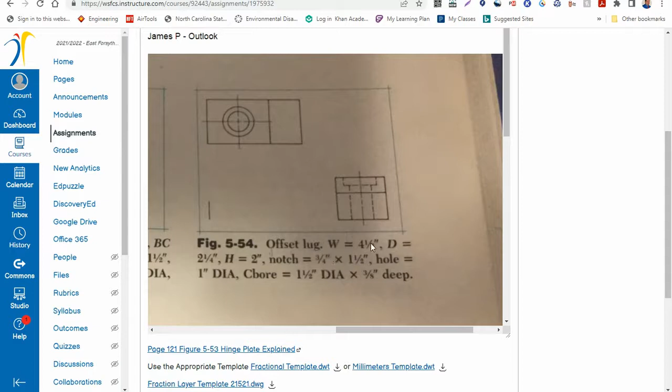What we're going to start off with, we're going to go to the top view first and work the top view down. So the top view is going to be 4.5 long and 2.25 inches wide.

Let's go to AutoCAD.

What I'm going to do is go ahead and set up, since I already know what the layer properties are because I've already got those set. We've got my center, my dimension lines, my hidden lines, my object lines, and construction lines. My object and construction lines are continuous. My object line is 0.5. My hidden lines are 0.25, and they're hidden. My dimension lines are continuous and 0.25. My center lines are center type, and 0.25 thickness.

So let's go ahead and get started with the drawing here. Start with my construction line, and it would help if I got to my layer here. Turn on my ortho mode to make sure I'm straight as I'm working. That sets my zero point right there.

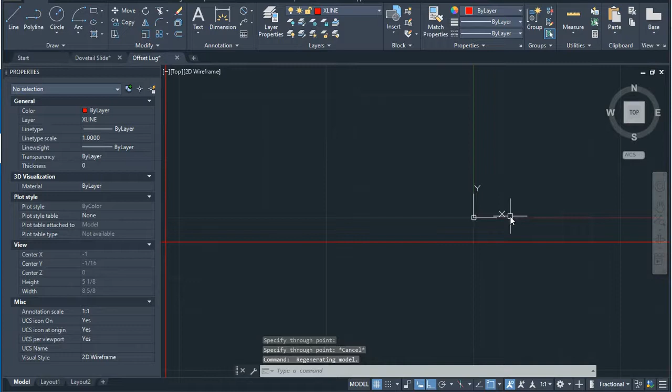Now, going back to my drawing, I know the depth is 2.25 and the length is 4.5, so let's get started with the block on that one. I know it's 2.25 inches tall, by 4.5. All right, so that's pretty much my top view right there, except for blocking everything in.

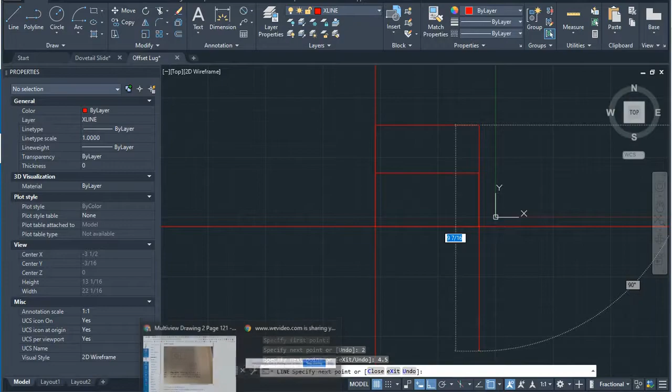That at least gives us something to tie off of for our top view. We're going off of that for 2 inches, come down 4.5, go 2.25. Let me check - my depth is 2.25, my height is 2 inches. And then my height there is 2 inches, 4.5 by 2.

Let's get back to our drawing. I'm going to offset that end line here inside 1.5 inches. And right there it is.

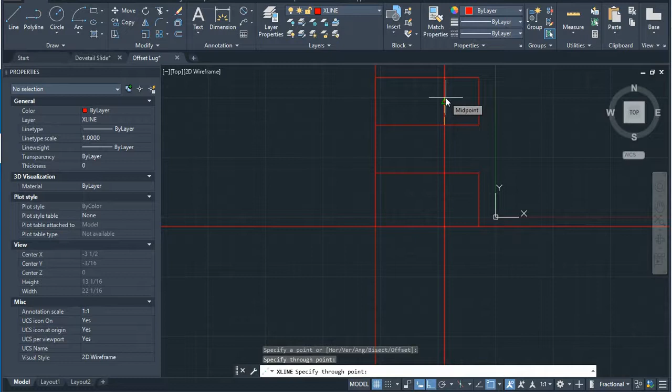I know it's 1.5 this way, 3/4 down is what it's talking about. But one of the things I can do now is set my construction line there, come down 3/4 of an inch (0.75), come over one, come over here to 1.5.

Now we get back to my circle on my top view, my counter bore. My center circle, even my outer bore, my outer circle is going to be 1.5, and 1 inch diameter is my circle going all the way through. The counter bore is basically made for a machine part to fit through there with a nut and a washer on it, or an axle of some type with an axle clip.

All right, so let's go back to our drawing. We're going to draw that center hole, 1 inch diameter, and then put a diameter on the outside of that - a concentric diameter. Now, they're both diameters.

So let's get our circle tool. Let's go in here. Now there's more than one way to do this. We can find our center, where the center is going to go, by crossing these up here. Turn off our ortho.

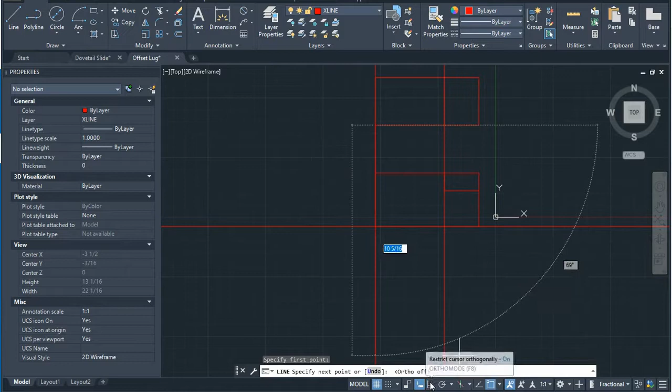Remember, we're on a construction line layer. My center circle there is 1 inch, and my outer circle is 1.5.

Now we could have found that if we'd blocked this in, joined these sides together here, and made that into one polygon - we could have found the center using the geometric center snap. But it's a whole lot easier and quicker doing it this way, just having your rectangle shaped out, putting your X in the middle. We're on the construction line layer anyway, so why worry about what it looks like on that layer?

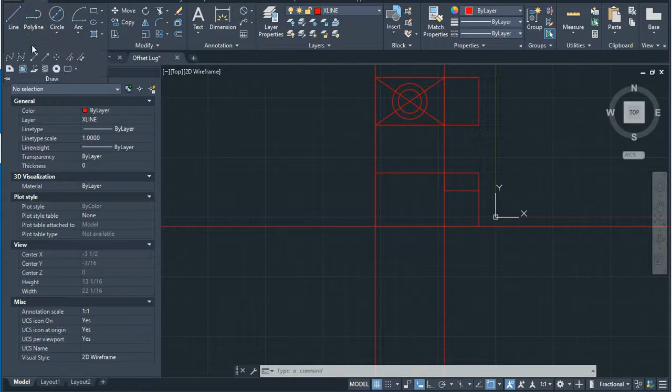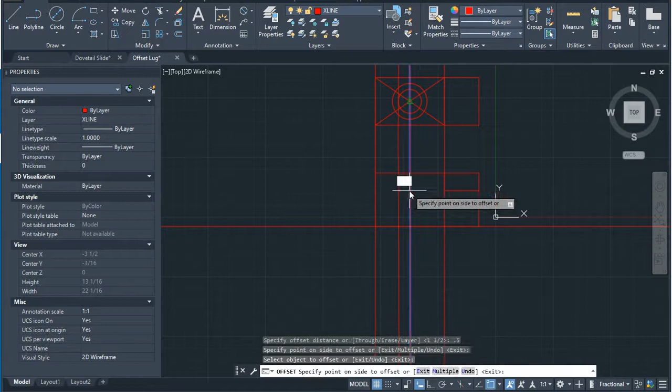All right, now what we're going to do to translate these lines down is, first of all, come down here with a construction line. We could sit here and painstakingly take these lines one at a time, but guess what - I'm not going to do that. So I'm going to select that line and offset it 0.5. I'll set it on this side 0.5. That takes care of the 1 inch circle in the middle.

Then we'll go here. Now that line is going out 3/4 of an inch - the next line, 0.75. Right there, and then out here. I know it's 0.75 from here to the outside of the line because it's 1.5 in diameter, 0.75 from the center to the edge there.

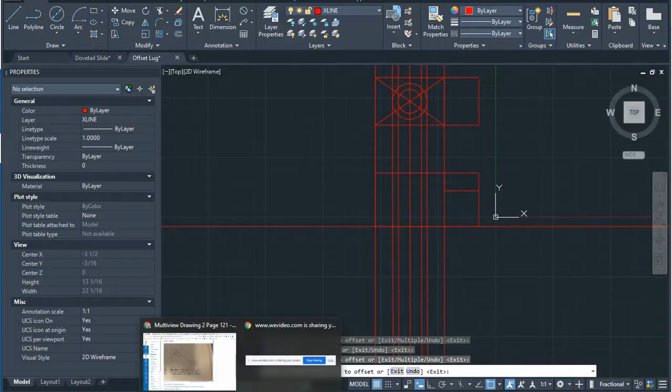Now, we need to get back to our drawing and look how deep this goes. We know it's 3/8 of an inch deep.

One thing we could do here, escape, we can actually offset that line right there, 0.375 or 3/8 of an inch below here, and then we're able to come in and hit escape. Now, that actually helps us draw later on when we're drawing.

All right, so I think that's it from the top view and the front view. We just got to worry about the right side view now. We know the thickness, or the width of that, is 2 1/4. We know the height is 2. We know how that notch is placed.

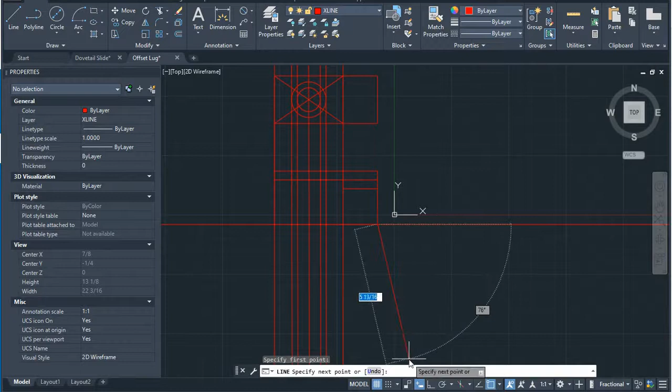Let's go back to our drawing real quick. Get our hand tool, move that over a little bit. I'm going to go over 2 inches. We turn on our ortho mode again. Go over 2. Go up 2 1/4. Go in 2. Back down 2 1/4. In 2.

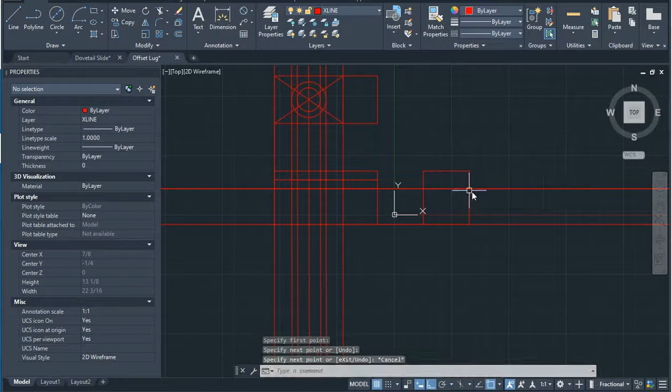Now we can put our construction line there if we want to, but guess what? I guess we'll have to, because that's not showing off my extension line there. And then I'm going to take a construction line down through the center of that to help me with this next thing here. All right, so what I need to do is finish blocking in that hole here.

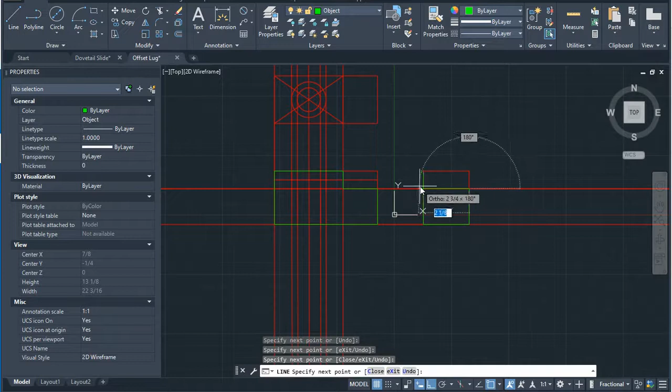And now I'm going to get to my object line layer. Basically just copy everything I've got that I know should be there. I'm not even looking at the measurements, I'm just waiting for the end points to come up. That's the beauty of having your construction line layer and being able to turn it off.

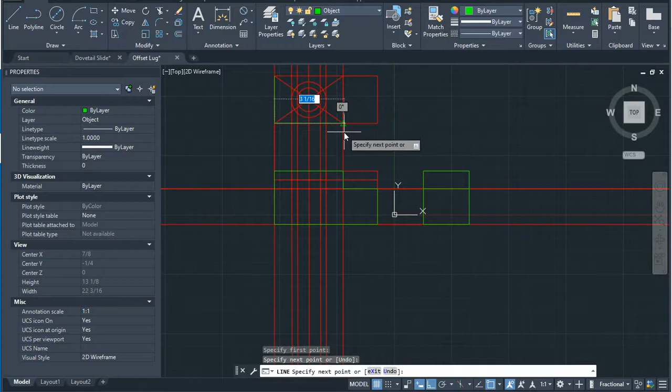Go up here and block this in. Type in 1 inch for the middle circle there, and 1 1/2 for the outer circle. 1.5.

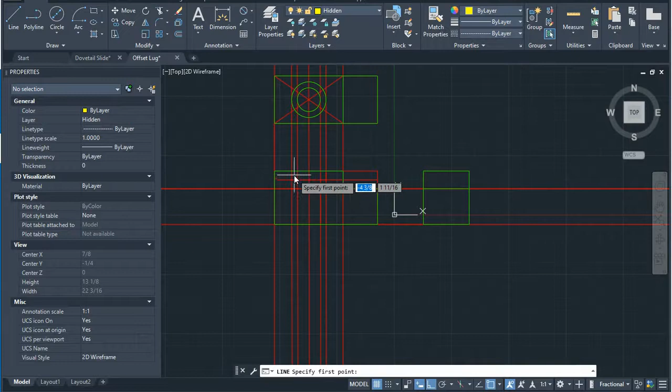And then we're going to measure this. We're going to change our layer here, our hidden layer. And this is what we're going to do right here. We're going to zoom in, and we're basically just showing you what it would look like looking at that from an X-ray vision.

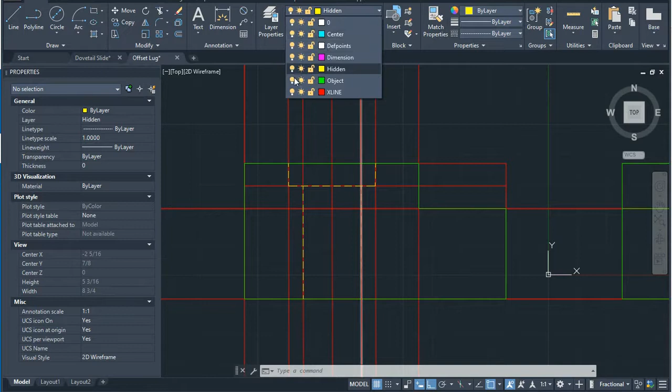All right, now I'm getting ready to do something else to blow your mind here. I'm getting ready to offset that one by 1/4 inch, 0.25, just something to help me out here. I did the one on the bottom, 0.25, offset that as well. Hit escape. Now I'm going to go back to my object line layer.

I want to go to my center line layer now. I don't want to change the color, I just want to go to it. This is one reason. Move those lines up and down there.

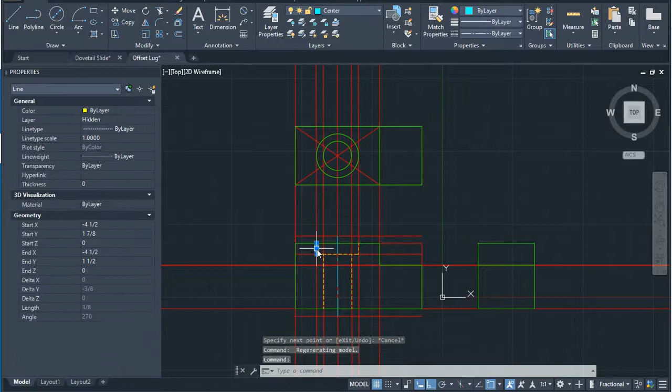That way I have some way to lock onto it because I've got so many line segments there. Now what I need to do is select that line, this line, and this line. I can copy that using this as my base point right there. Look, I lost something out there. Now I'm going to try to go copy it again. Set that as my base point. And there's my midpoint of that line. Hit escape.

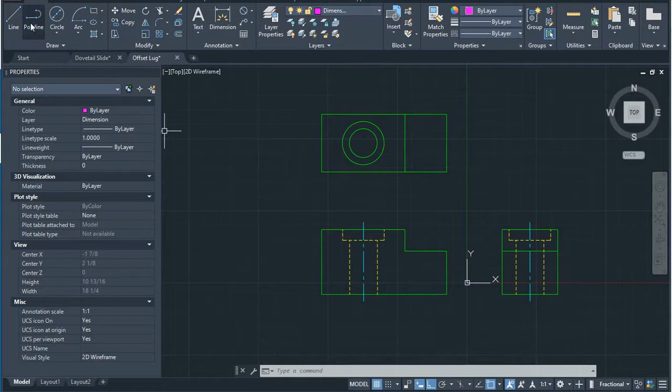Turn off my construction lines, and just go to my dimension line layer. We knew that one was 3. We knew that was 1.5. We know that's 2.

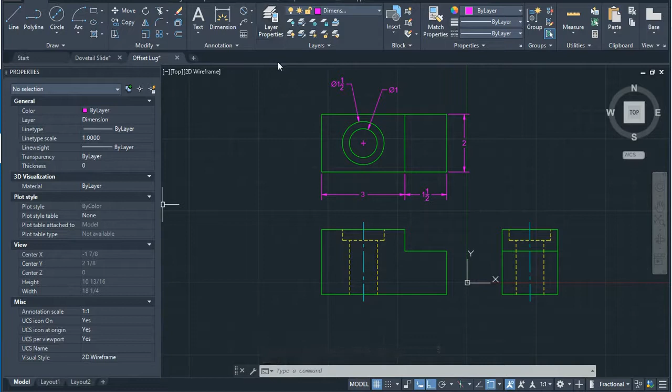Make sure you dimension your circles in the view that they're circles. The outer one's 1.5, inner one's 1. Now there's one dimension here that I got to add in. That's 3/4.

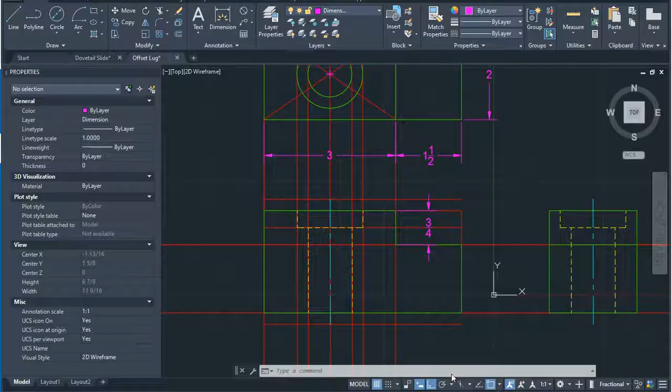No, that's not right. Give me just a second here. Yeah, that was right, I'm sorry, just had to check. I scared myself there. I make mistakes, so I just want to make sure I didn't make a big one there. I scared myself into thinking that was 3/8, but it's 3/8 in your counterbore.

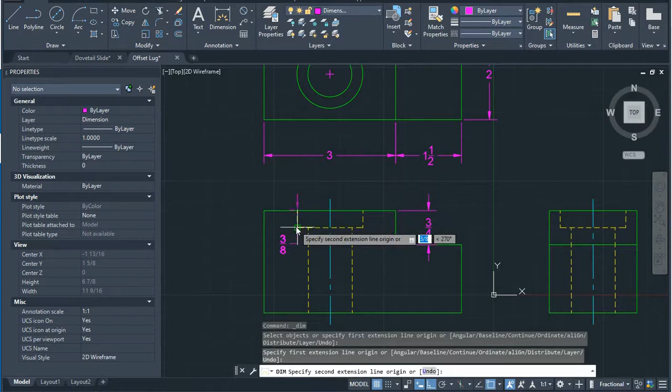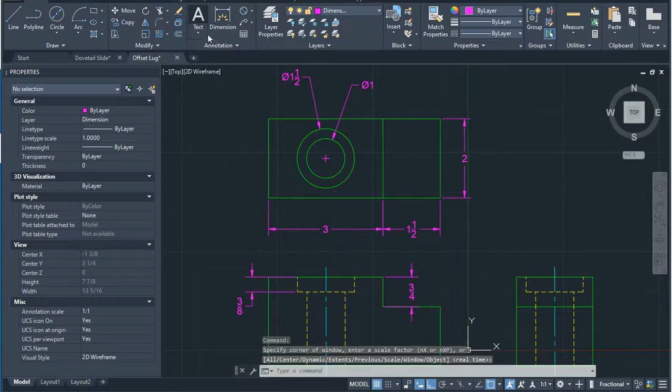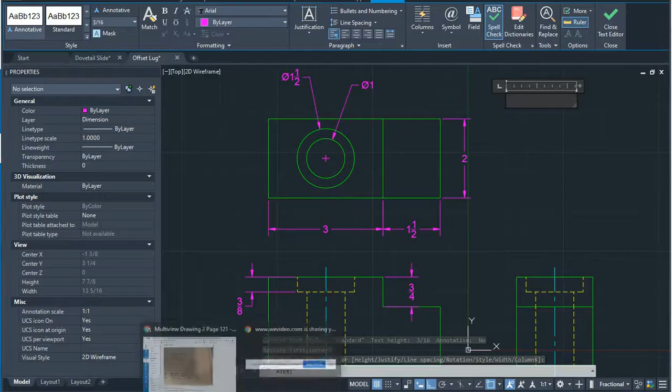And one of the things you can do here too, you put a note on your drawing. I like using the multi-line text because the counterbore, the C bore, is 1.5 diameter by 3/8 inch deep.

So basically what you would do is write your note: counterbore, C bore, 1.5, diameter. I can spell right and get my keys to hit right.

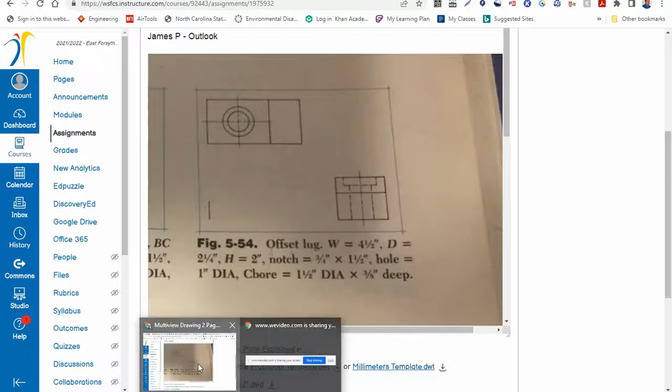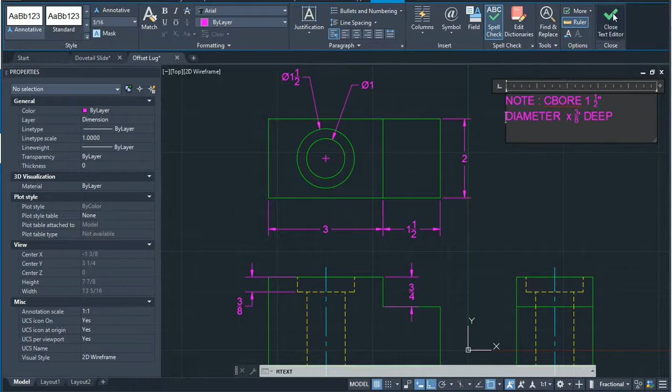Counterbore is 1.5 inch diameter times 3/8 inch deep. Just use the X for the times, 3/8 inch deep. And I'm going to do that right there, close that text. I'm going to move that closer to the counterbore.

My computer is being slow again.

And what we can do here is we draw an arrow. My computer's fighting with me over putting this leader here.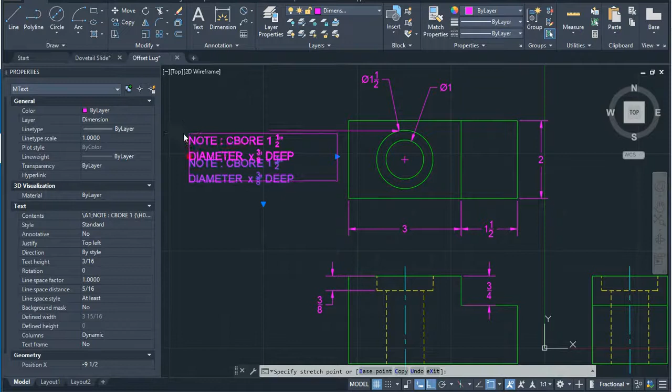That is your offset lug. The only dimension I did not add was this one here. There's 2 dimensions I need to give here: need the height here, and the total height over here.

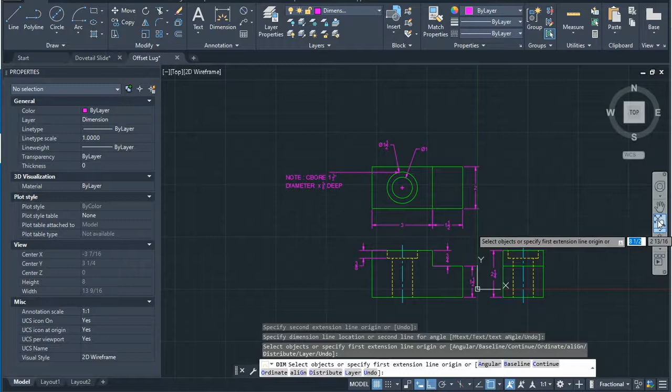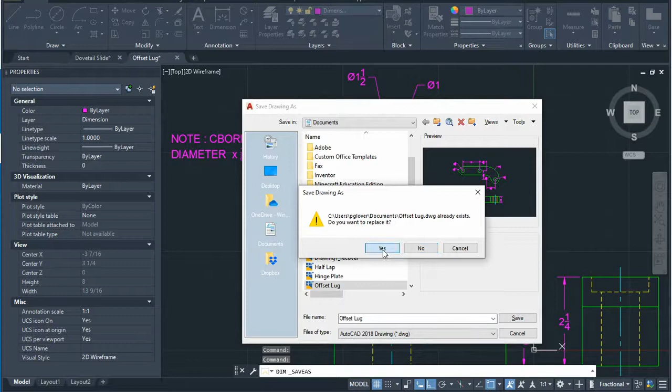Get back in here. Go to File, Save As. I'm going to save that as offset lug, that's page 121. And so save that as offset lug. And yes, I want to replace that.